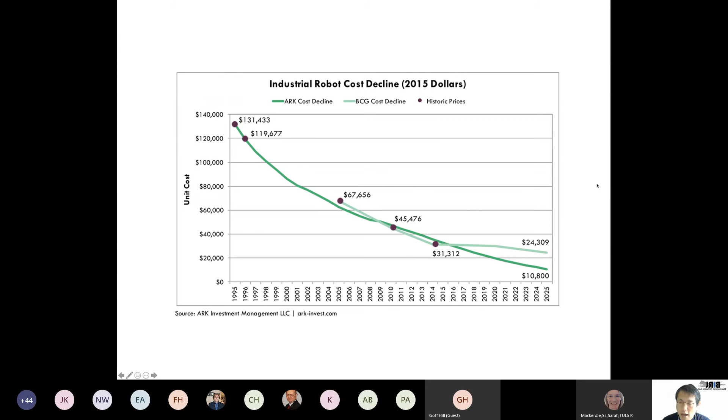The cheaper means that we have technology costs really reduced in the last decades. Just to give an example—similar figures can be found in many places—robotic arm cost has decreased about 60-70% in the last 20-30 years, and this trend is continuing over the next 10-20 years. The price of a robotic arm used to be hundreds of thousands of US dollars or pounds, but now we can buy it for about 20-30,000, and in the future it's going to be cheaper. That will obviously change the landscape of where technologies can be applied.

Also the easier part: technologies are now available in markets. If you have a bit of money you can buy them instead of building everything from scratch in your company or lab, which speeds up development quite a lot. But even more important is probably the connected and shared technologies—a lot of programs and software are already on the internet ready for download, and even designs for mechanical systems are online so you can download them and 3D print if you have a little knowledge of engineering. This is a really exciting point in history, in the sense that robotics is going everywhere, and even if you're not doing robotics now, it's not too late to start, because it's getting easier, cheaper, and faster.

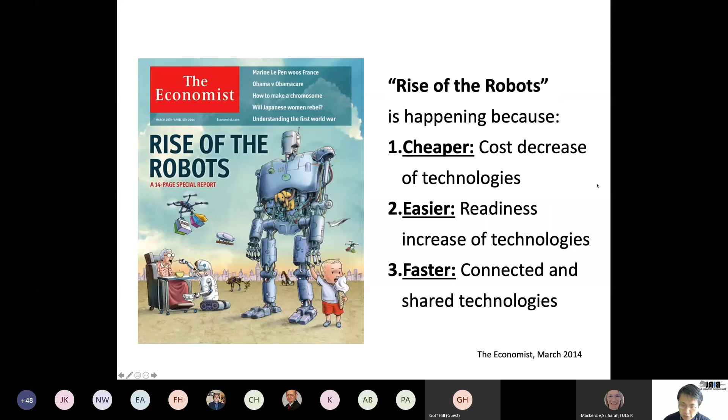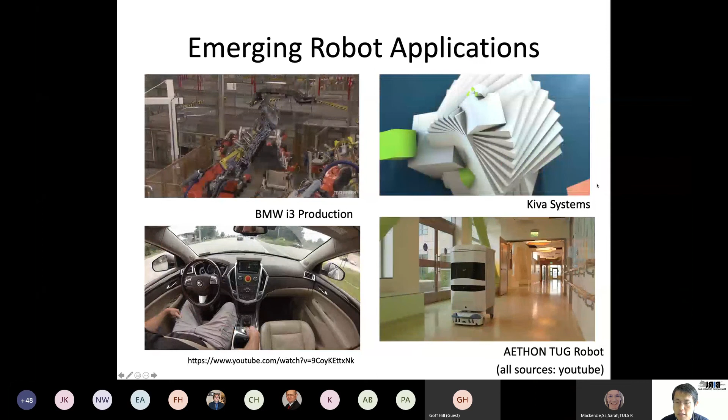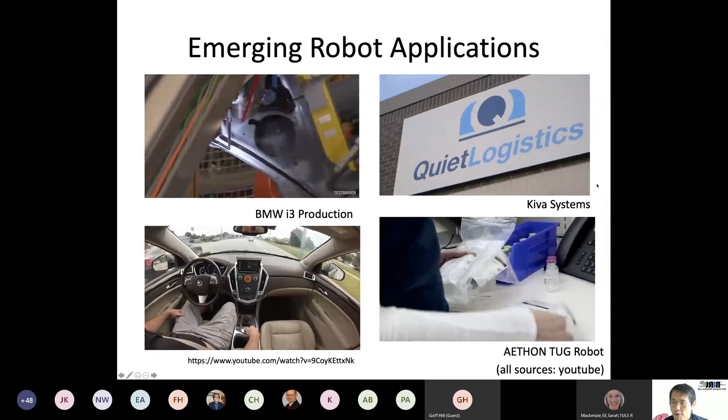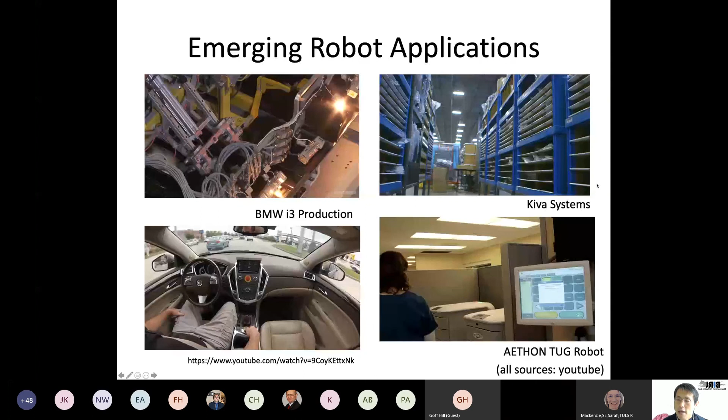We just want to give you some ideas of where the robots are. We don't see robots in our house yet, but robots are actually integrated in many different places in our society. A case in point is car manufacturing factories, where there are a lot more robots than humans nowadays in the latest manufacturing processes. And if you go to warehouses, that revolution is also happening—instead of humans walking around the warehouse, nowadays robots are moving around, delivering items to humans so that delivery can be faster and more accurate. The robots are coming closer to our lives.

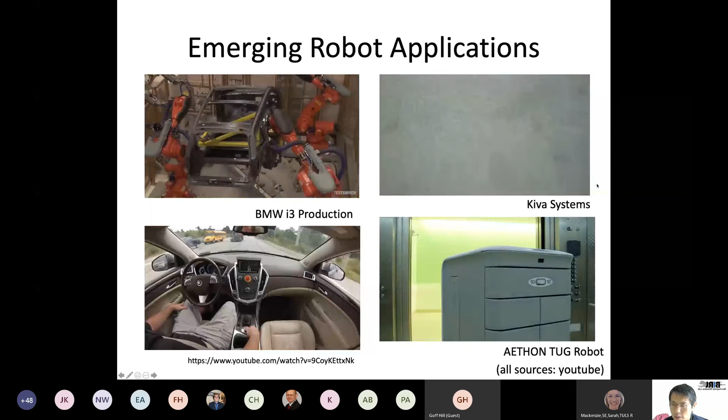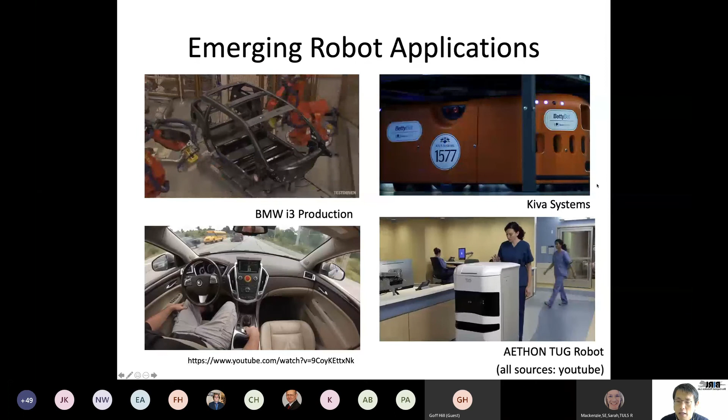We all know that autonomous driving is coming to our daily life in the near future. And delivery systems have attracted a lot of attention, especially with the current problem of social distancing and so on. So you see lots of robots here and there, and there are lots of reports available in the world.

But obviously, not all of these problems are solved so far. The really important question for us, especially for researchers, is which of these problems are solved, and which of them are more difficult or impossible to solve in the near future. So that's a really difficult and important question.

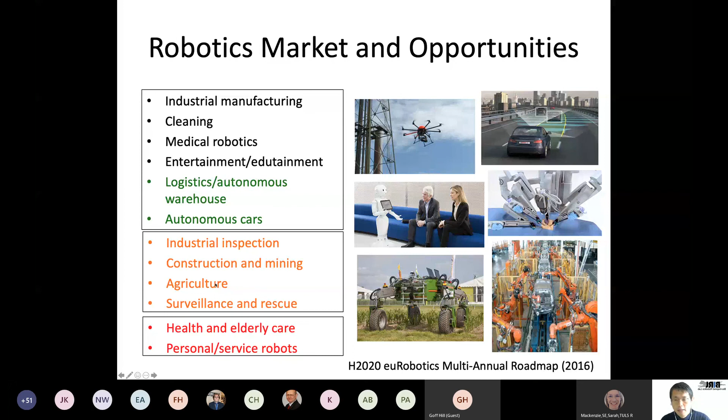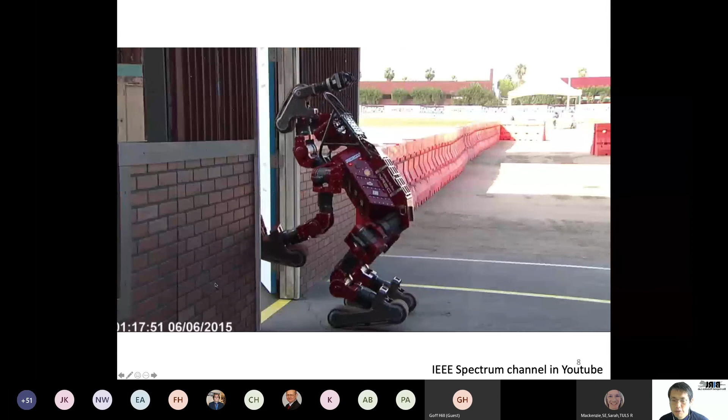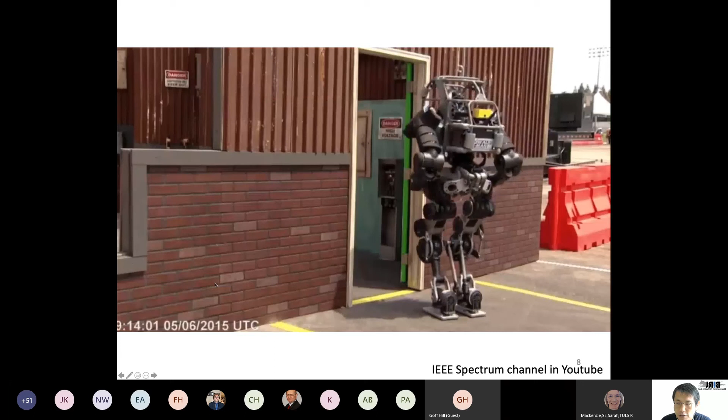So, what can robots not do? This is a famous video you can find on YouTube—the results of a robotic competition 5 years ago, in 2015, in the United States. They actually tried to honestly evaluate how useful robots are in unstructured, complex challenges. This was a competition where they replicated the disaster site of the Fukushima nuclear power plant.

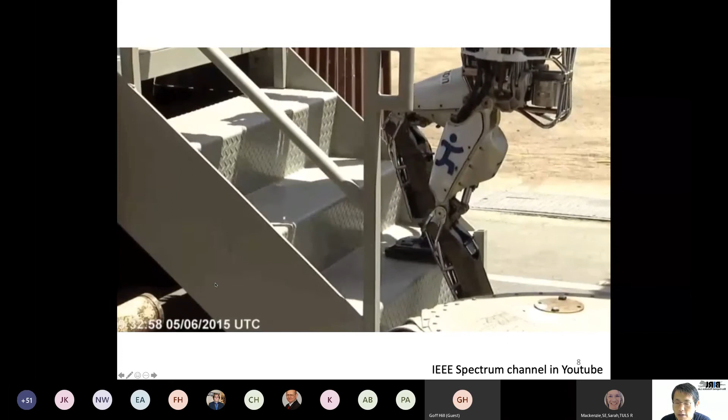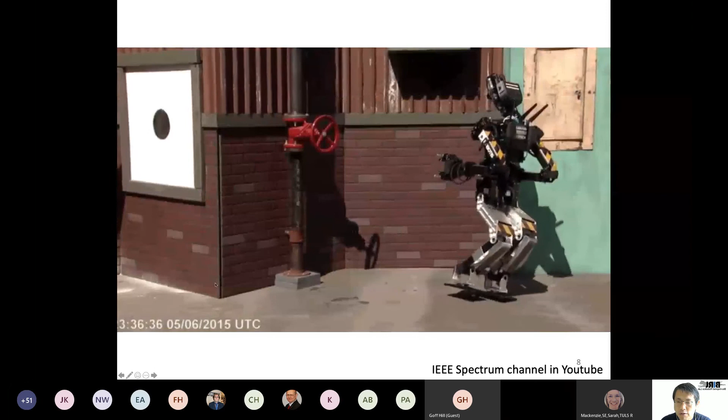After the accident, robots were not very useful at that time, so they were trying to evaluate why robots cannot be used in such a complex environment. As you see in the video, the robots really suffered from easy things like opening or closing doors, opening valves, walking on rough terrain, or climbing upstairs and so on.

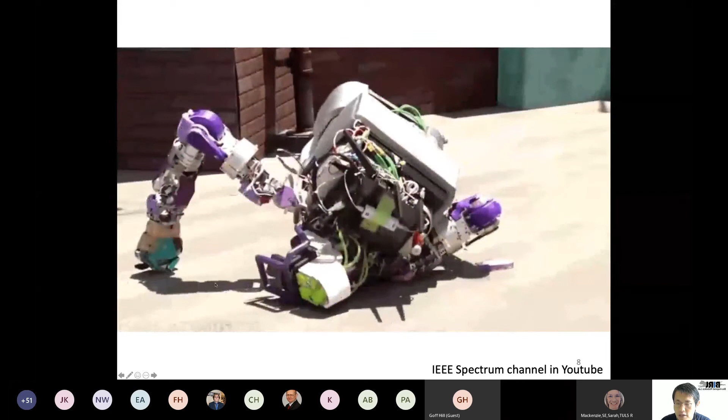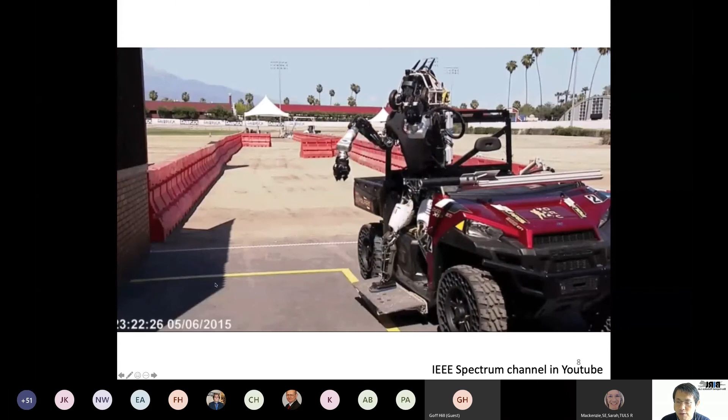And this is actually the reality. It's a really interesting challenge—all these complex robots trying to solve real problems in the real world, but actually our robots have very limited capability. So driving a car is rather easy, but getting off the car is more difficult, as you can see in this video.

So the interesting discussion is: I showed a prior video of a high-performance robot doing complicated things, but here, rather easy things like opening a door or getting off a car—things our child can do quite easily—top researchers are struggling to build for this kind of task. Why is this actually the case? That's an interesting question to explore.

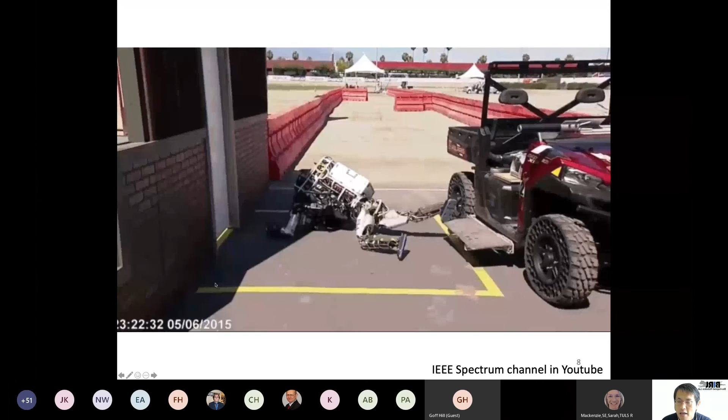To understand this, we just need to understand a bit about the state of the art in robotics. Interestingly, probably 99% of robots in the world use only two basic principles of robotics, and one of them is kinematic-control robots.

What they're doing is only position control, so they can position part of the body in a particular location in time. But what they cannot do is the interaction with the environment. This robot is moving hands in a very rapid way, but they don't put too much force acting on the body and acting on the environment. So the interaction with the environment is a very, very big challenge at the moment.

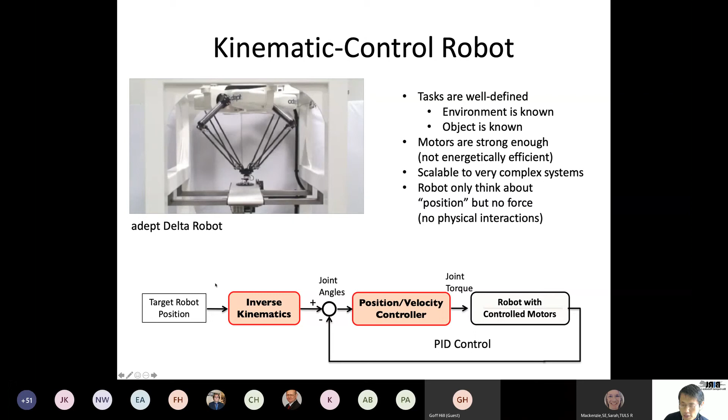So this is really a constrained situation. The robot can do very complex things as long as you don't interact with the environment. But as soon as you interact with the environment, you cannot really do complex things. So that's where we are at the moment.

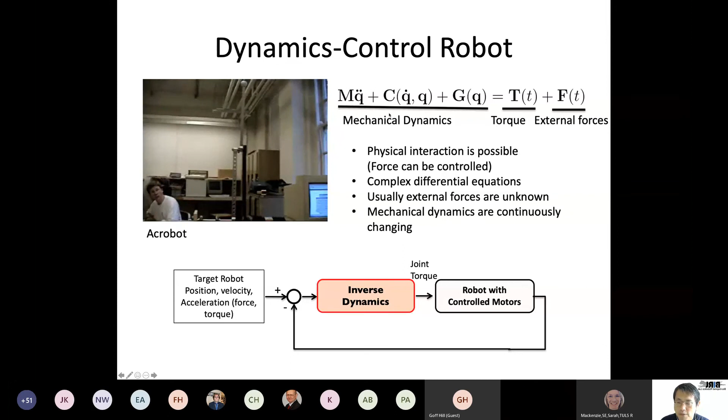If you go to the real world, this is one of the collaboration projects with farmers at the moment. This is the harvesting side of the robot, harvesting lettuces. Robots cannot really be applied very easily here because what humans are doing is very complex interaction. If you think about it, the humans are interacting with the lettuce, cutting it, removing leaves, and putting it in the plastic bag so that they can put it in the sorting mechanism.

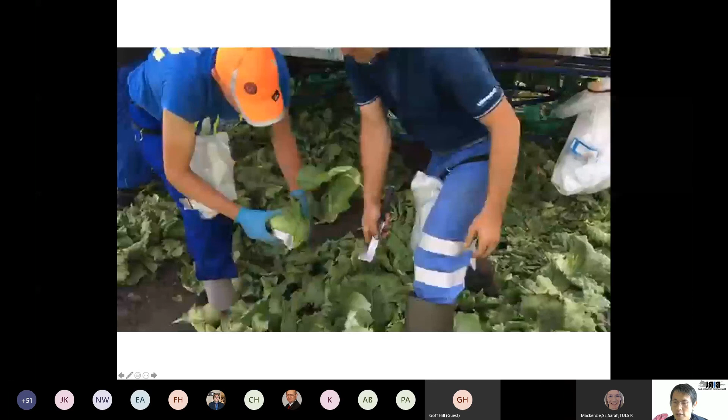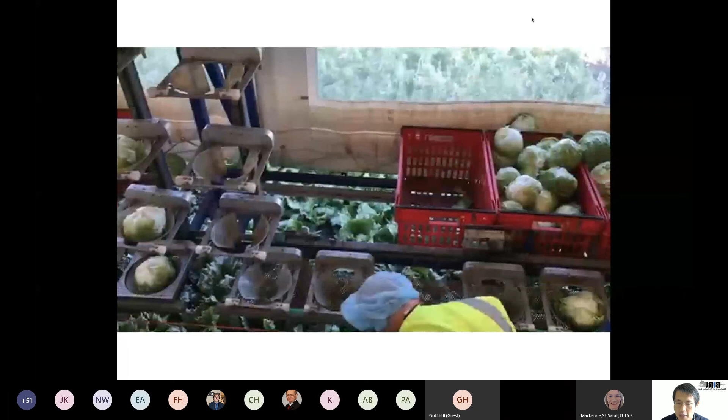Of course, a lot of things are already mechanized. So after harvesting, the machine in the back is doing all sorts of automated delivering processes of the products. But the difficult bits, like interacting with the crops in the fields, are all done by humans at the moment.

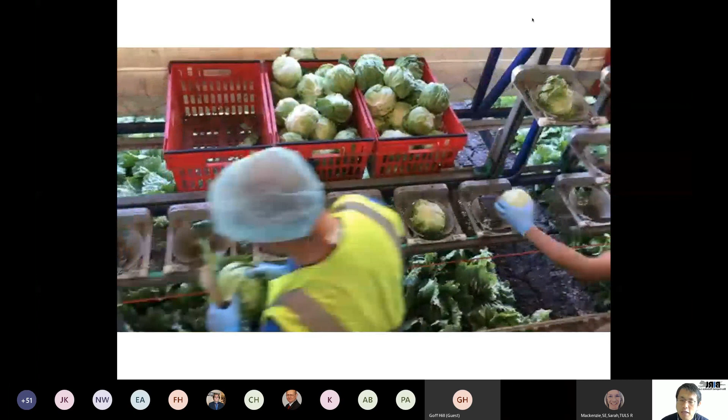There are many challenges like this, especially in the food supply chain at the moment.

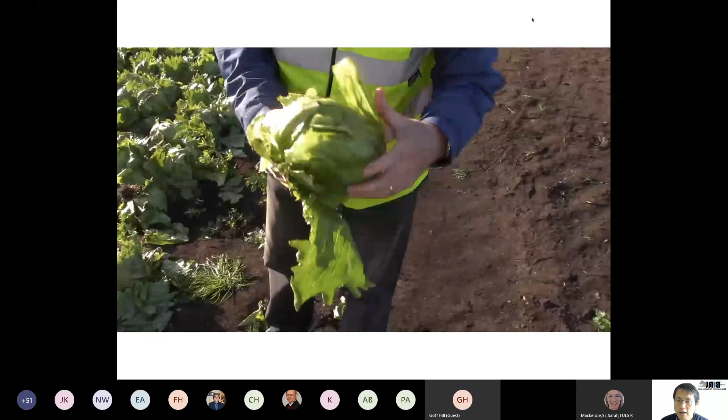I can show you some more examples, and here is the example of how the trimming of leaves can be done. The interesting thing is that every lettuce is different, every leaf is different, and this is a very difficult challenge for modeling it, but humans can do it in a fraction of seconds, doing all this trimming very instantly.

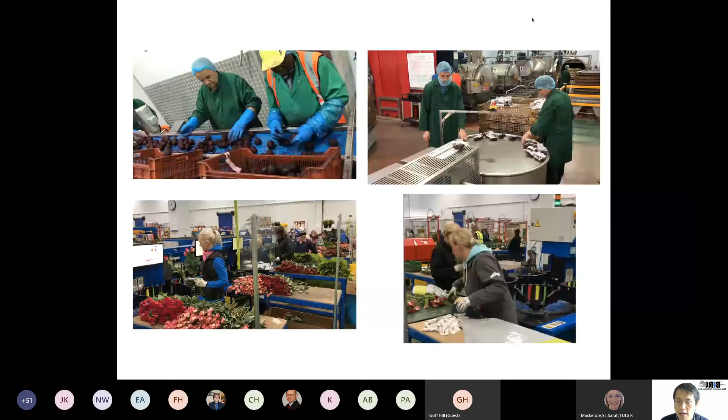Also, some other challenges, like here we show some examples in the beetroot cooking factory. This is a factory located in Cambridgeshire where the cooked beetroot was manually inspected and trimmed by human laborers. And the bottom videos are showing a flower bouquet factory.

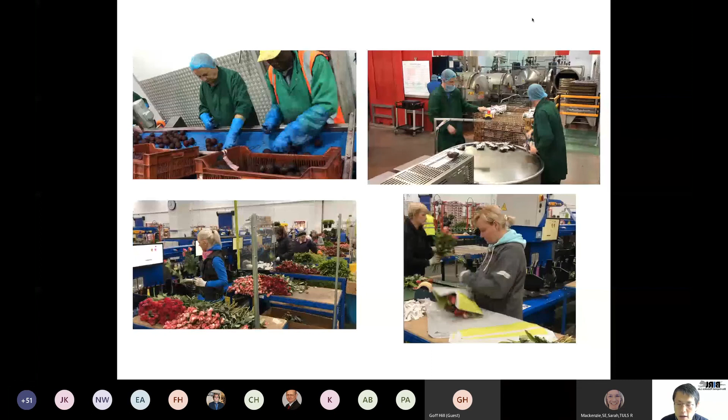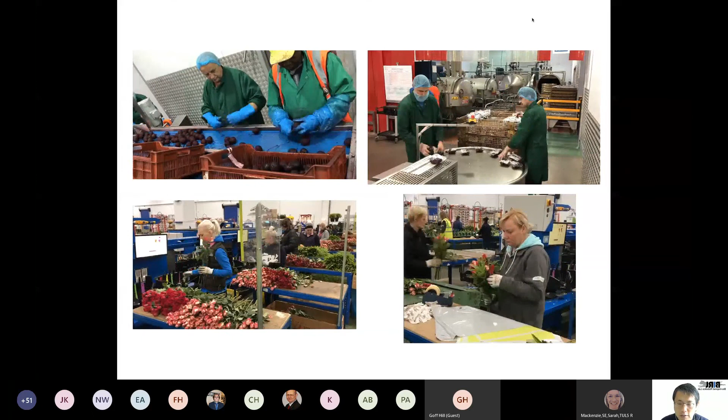This is the factory where they need to make a bouquet out of cut flowers, but a lot of things are manually handled because every flower is different, and aesthetic is very important. So we still have to rely on human laborers here.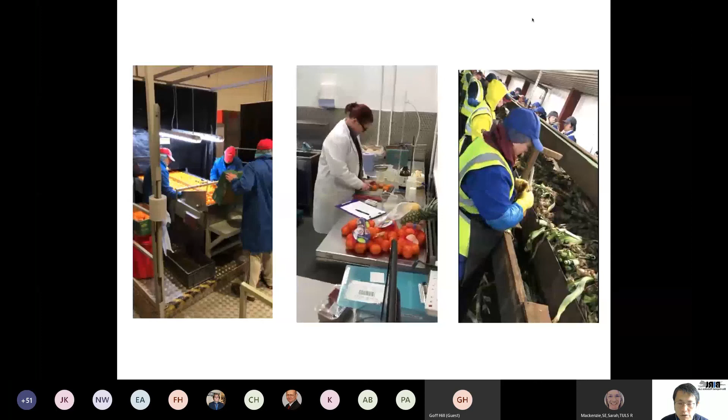Some more examples here are the quality control process in a logistics company, where they're checking every orange, melon, or pineapple, basically manually handled, so that they can measure the sugar level or the quality in general of the products they have.

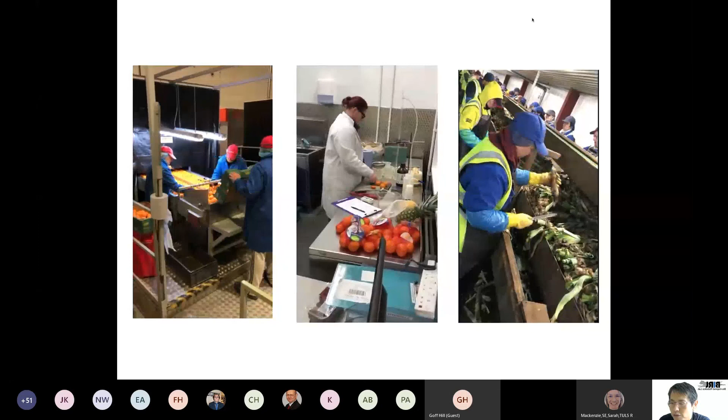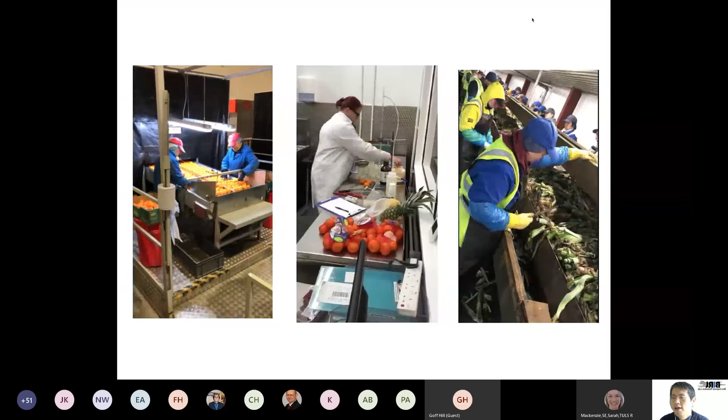And the last video showing on the right-hand side is probably the most difficult one, which is the leek trimming process, where hundreds of humans are actually trimming the leeks so that they can sell them in the supermarket.

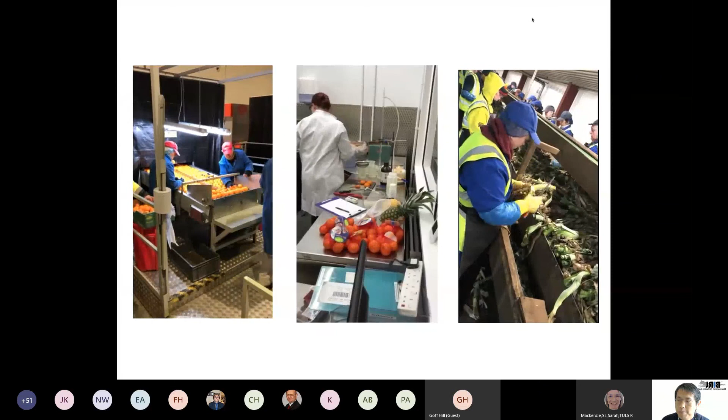We see hundreds and hundreds of workers of this kind still in the UK, and all of this is actually in Cambridgeshire alone. So we already see hundreds of people working on this kind of rather unhealthy and tedious challenge. We're trying to make a bit of a contribution to solve some of the problems there. But obviously, the robots have very little to do in this environment at the moment.

And the problems are mainly on these five points. So first of all, the cost issue — our technology is very expensive.

Most of the human workers are working at minimum wage in UK standards, which is about £8 per hour. And our technology cannot go down as low as this.

But apart from economics, I think technologically there are lots of challenges. Robots are not as dexterous as humans. They cannot do complicated processes, and they cannot do complex sensing problems. Physical contact is very limited at the moment. Also, adaptability is a challenge, like how robots can do many different kinds of things as humans do.

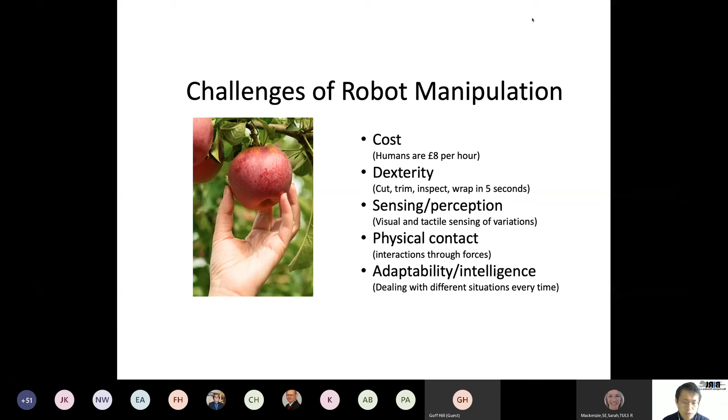So this is the kind of challenge we are trying to solve in the university at the moment. And one of the real challenges is that we actually need quite a paradigm shift in the technology that we have.

Most of the technology we see in the agricultural field is what we call Robotics 1.0. These are machines designed for specific tasks, optimized for one single task, and they can be very fast, efficient and cheap. But what they can do is only one thing, and that's the problem of where the robot cannot go at the moment.

On the other hand, if you go to car factories and other places where we see robots, we call this Robotics 2.0. They have a lot of sensors, lots of computation, a lot of AI. Those robots can do lots of different kinds of things. They're not optimized for one single task, but they can do different things. They have a lot of redundancy, and they can sometimes be adaptive to different kinds of things.

But the real challenge here is actually they are very, very expensive. So this technology can be applied to rather high margin businesses like the automobile industry or some other construction sites, but not in agriculture, because they have a very limited profit margin.

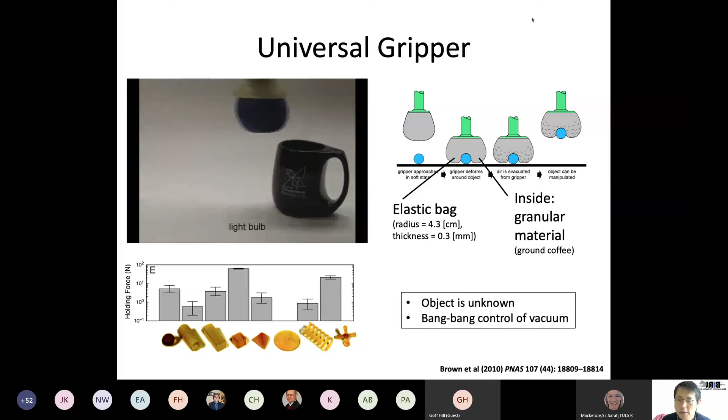So this is a really interesting example because it changes our way of thinking about how to build robots with actuators and sensors.

So the way how it works, the next slide shows how this actual system works. This is the only equation we show in our lecture today, so don't worry too much about it. But the mechanism behind this system is that we have a gripper here. When the gripper is physically in contact with the object like this, the gripper makes some deformation, because of the force acting between the object and the gripper. The deformation is very important because it determines how the force between object and gripper actually occurs.

So the force between object and gripper can be described by the friction force and the sucking force. The friction force and sucking force can be calculated by the geometry of the gripper as deformed by the object. So as soon as you know the angle of contact or area of contact, you can calculate the friction force and sucking force, and so on. You can estimate how heavy an object this gripper can pick up with this kind of equation.

But the most important thing is not the equation here. The equation is actually different object to object. If you have a different object, the equation actually changes. But this equation can be determined by itself. There's a self-organization process of this force acting on this object, and the gripper can be determined by interaction with it, and the deformation plays a very important role for this self-organization to happen. So this is a very different paradigm from conventional rigid robotics, because with a deformable object, you can have an interesting interaction without too much headache about the equation and modeling of the interaction. This is something we didn't have in the conventional robotics paradigm.

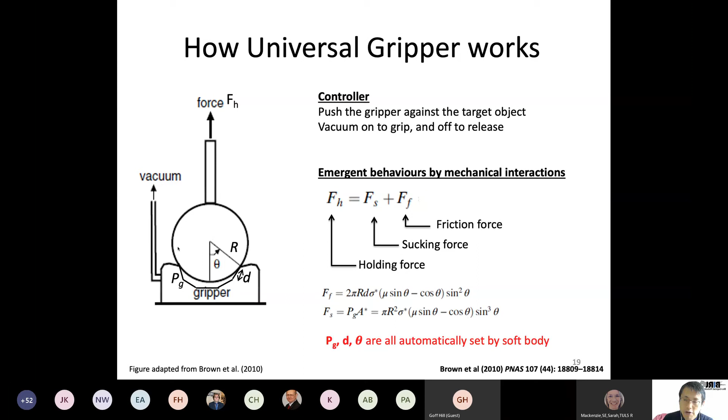But on the other hand, softness is not the only important thing. Rigidity is important, because if you don't have rigidity, you cannot grasp the object. So here, the deformation and stiffening of the gripper is happening because of the vacuum applied to it. So what's really important here is the new paradigm of soft robotics.

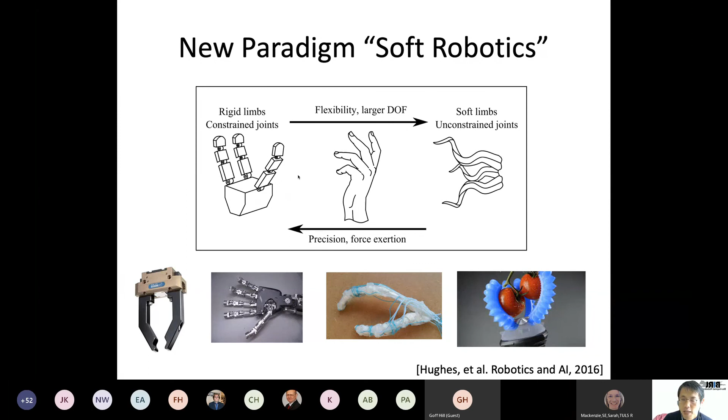But soft alone cannot solve so many problems because the force cannot be transmitted. So the real design challenge here is how we can go back and forth between the soft regime and the hard regime in a flexible way. How we can take advantage of the good aspects of both rigid and soft regimes—that's actually what our hand is doing, because our hand is quite soft if we don't do anything, but we can make it really rigid if we need to.

So that's something we want to understand, how we can make robots like this. We did quite some study of biomechanics and the anatomy of our body. Our body is a soft, rigid, hybrid continuum structure. This is a very interesting aspect that our traditional robots don't have. We have a very packed sensor-motor unit in our body, so that's another way we need to think about it. And overall, we need a lot more complex control procedures that allow the use of this complex structure in our hands.

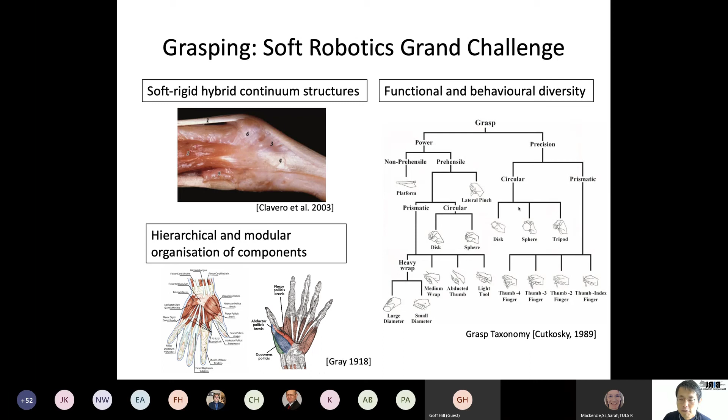So I just want to show you some highlights of our recent research work. All these robots are quite useless at the moment, but it goes down to the real fundamental question about how we can make soft robots.

One attempt we did quite some time ago is the anthropomorphic robotic finger. We basically copied the anatomy of our hands, human hands, into artificial fingers. We 3D printed bones and put them together with elastic ligaments and tendons, and added motors so that we can actuate these fingers in a human-like fashion. The motion of these fingers is quite interesting—it's more human-like than conventional robots.

But the real challenge is that as soon as you have a soft body, we need lots of motors. In this case, we made a structure of 2.5 fingers like a human hand, and we needed 14 motors to control such soft structures. This is really useless at the moment, but it captures a really important point on how complicated it is to control soft structures, although there are lots of interesting aspects in soft structure.

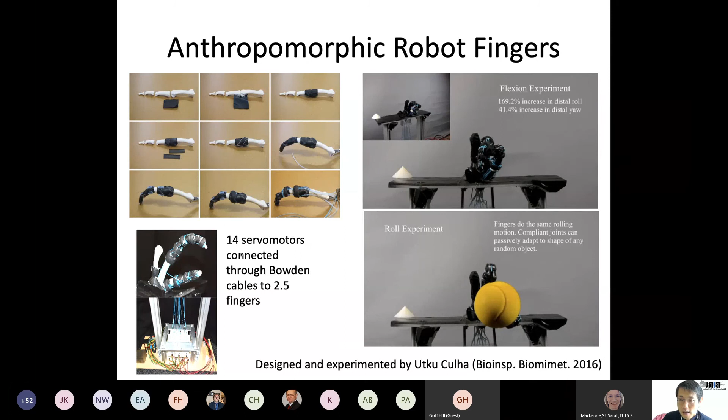So we started investigating new manufacturing techniques to cope with complex structures like our hand. This is the attempt we tried with the multi-material 3D printer, which is able to print both hard, rigid, and soft materials. Here we try to make a hand skeleton with rigid bones and soft ligaments in one go. We can wait 7 or 8 hours to print one hand, but everything can be automated—in one night, you can make a very complex structure like our hand.

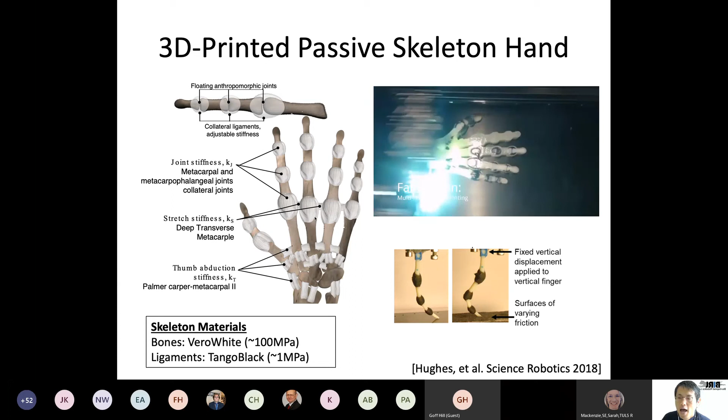We are also interested in how we can use such a complex structure, skeleton body. So this is an example of a passive anthropomorphic hand controlled to grasp different kinds of things by applying wrist control. So the grasping is not just about the finger motion, but also the intelligent control of wrist motion, and that can actually help complex interaction with the environment.

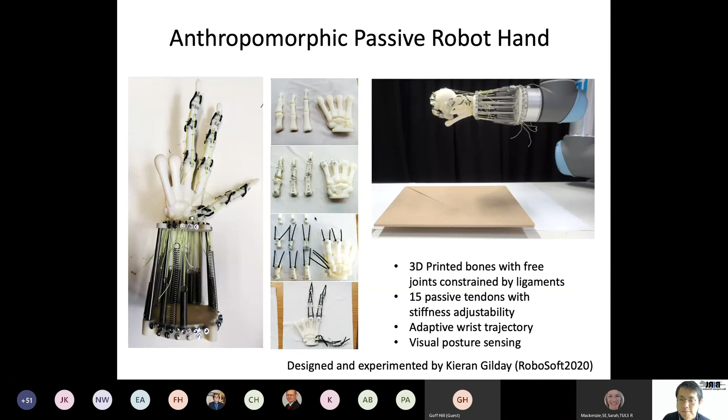And also the geometry is very important. Our hands developed over millions of years of evolution. So we have a collaboration with biologists on how we can think about good design for robots, not just copying nature or the design of our own hand. In the first place, we don't know if our 5-finger hand is already optimum or not. There are many other cases, like human families with 6 fingers, which was discovered recently, and whether there's any room for optimization in our hand or not.

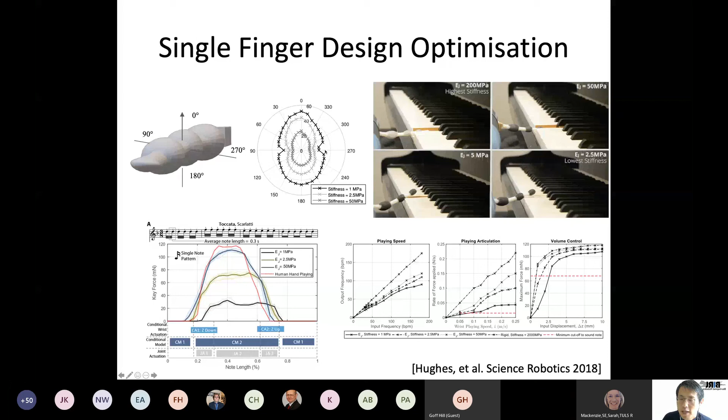So we're applying an optimization problem, like what mechanical properties we actually need for our hand. This is the example of the finger optimized for piano playing. If you play piano, rigidity is actually quite important to articulate sound. So we want one axis to be quite rigid, whereas in the other direction we want softness, because we need a lot of flexibility in behavior. If you think about playing a complex piece with side motion of the hand, we need a complex structure in the joints of the fingers so that we can do complex operations, and complex, quick operation of the hand can be done by passive properties of the hand.

So this is an interesting ongoing research about how we can make a complex structure with new manufacturing methods.

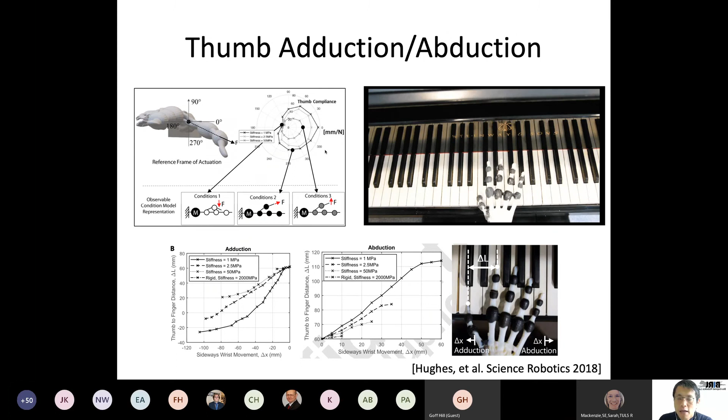One more thing we need to think about is the sensing problem. Electronics are usually very rigid. If we want to implement electronics in a soft structure, a lot of challenges come with it. So we are investigating how we can make sensors bendable and stretchable on soft surfaces. That's another big area of research, and we're experiencing a big advancement at the moment.

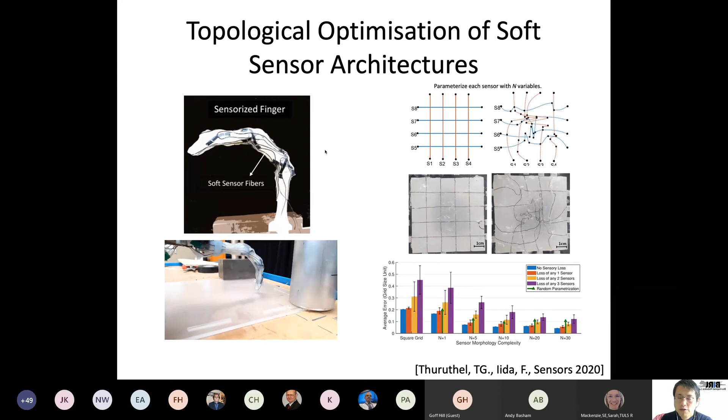So this is the main message I want to place in my presentation here. The last part I want to talk about is really the next big challenge: agile robot prototyping, to make a robot revolution happen. So what we've talked about so far is really the technology we're developing in university.

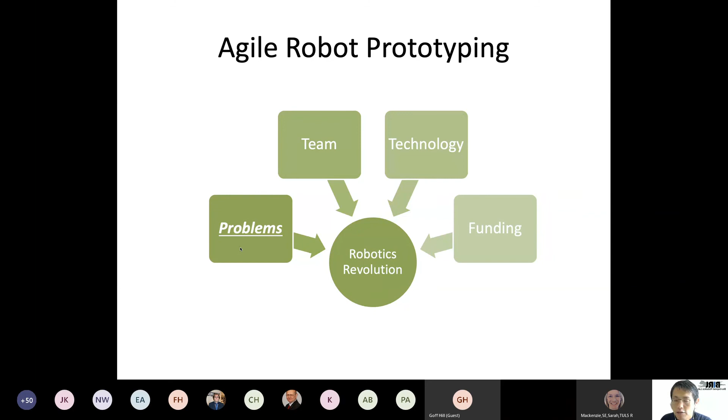I just want to show you some examples of how we did this problem-finding to make a robotic revolution happen. One example is the lettuce peeling problem I showed you earlier, from our collaboration with a lettuce harvesting company. Two graduate students in my group have looked at the lettuce peeling problem, and they've really found that this problem is not easy to solve.

They worked very hard over a couple of days in the lab to solve this problem in a brute force way using existing technology. This robot uses an existing robot platform with computer vision that applies stem detection and leaf detection using conventional computer vision algorithms. We then use 3D printing technology to modify a vacuum cleaner attached to this robot, adjusting how the leaves can be picked up rather than the entire lettuce. This kind of development can be very, very quick. The whole project was done in 4 months with a budget of £1,000.

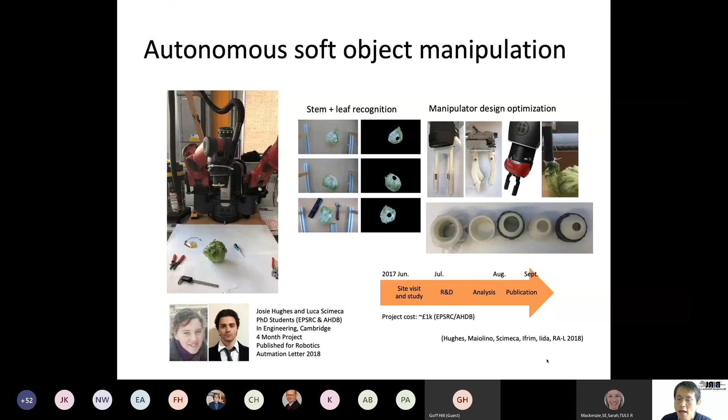This is the cheap, easy, fast development of the robot exemplified here. We were even able to publish this result in one of the most prestigious robotics journals. This case study shows how quick development of innovative solutions can be done with a minimum budget. And we have lots of other similar examples.

This is a computer vision problem worked on by undergrad students we have in Cambridge - a fourth-year undergrad student studying computer science. In collaboration with a farming and growing company, she wanted to apply state-of-the-art deep learning methods to detect and quality control lettuce before harvesting. She went to the field to take pictures and applied this data to existing deep learning methods, managing to solve the problem in about 4 or 5 months.

We went to the lettuce field at the beginning, the end of the season in October, then had 2 or 3 months of R&D, and did on-site testing when the season came back in April. We published very quickly again. This was an undergrad research project, so we didn't need much budget for it, and we could solve this problem quite easily.

The interesting thing is the deep learning method we used, called YOLO - the you-only-look-once algorithm - is available on the internet. We can download this code and the student can learn to use it through an online tutorial. What she needed was just to go to the field, take the data, and label it. Then we get results showing where the lettuces are, and we can see whether they are mature enough or infected, and so on.

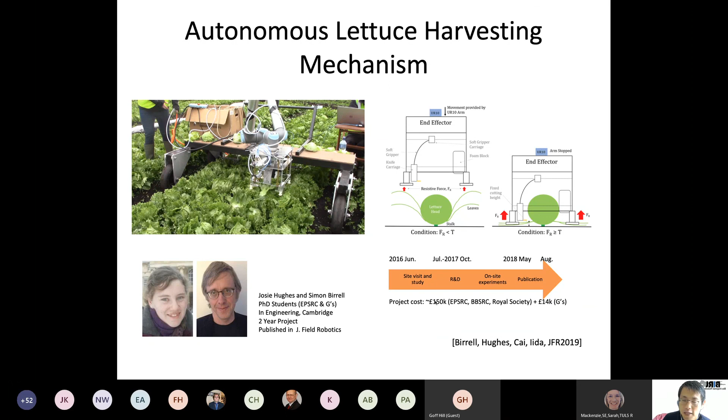Another example is tactile sensing of mango products. Mangoes and avocados are typical hard shell fruits, and it's very difficult to see their maturity level without destroying them. At the moment, everything is destroyed by sampling to analyze maturity.

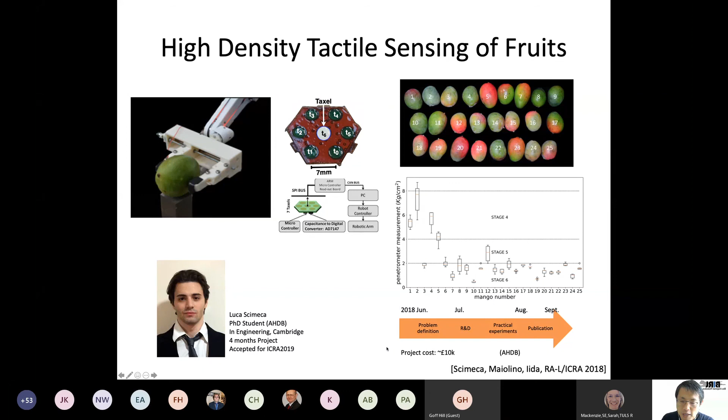Now we apply state-of-the-art tactile sensing technology, using sensors to analyze how maturity level and tactile sensing can be correlated, applying machine learning to see whether a tactile sensor can detect the maturity level of mango without destroying them. This was a 4-month project we did with one PhD student, sponsored by AHDB.

A slightly different direction of research we're doing is cooking, because cooking is a quite interesting challenge that everyone struggles with. We started with an undergrad student project with a kitchen appliance company to discuss what the future of the kitchen looks like. In this particular case, we thought of the omelette making process.

So we programmed the robot such that it can cook omelettes in a reliable manner. Here, the robot is actually able to make about one omelette in a few minutes. We feed it a lot of eggs so the robot can try different tastes of omelette. The robot actually makes 80 or 90 omelettes and gives them to human subjects to see whether humans can actually see the difference between the different omelettes in terms of taste, texture, appearance and so on.

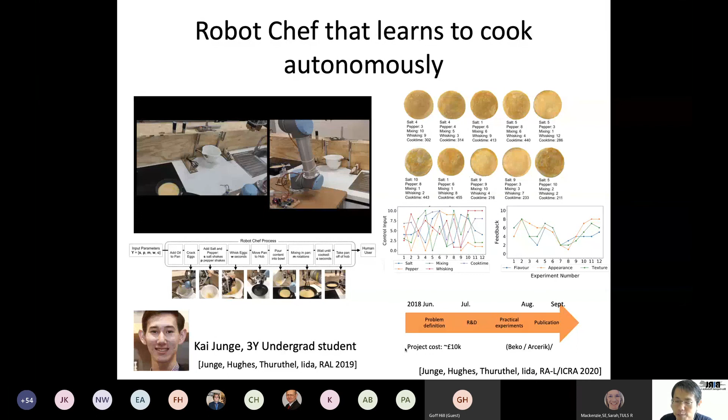One of the interesting challenges is how the robot can learn the preferences of individual humans. So we apply machine learning techniques to see if robots can actually figure out what cooking process is related to human preferences for the taste of the omelette. We're hoping that the robot can make better and better omelettes by interacting with humans through tasting.

A lot more we can do involves computer vision technique, because the cooking procedure is very complex, and programming robots for cooking is very, very challenging. So the new technology we're trying here is the state-of-the-art human pose estimation algorithm. This algorithm is not developed by ourselves - we found it on the internet. It's called the Open Pose tracking algorithm. The undergrad students actually learned to use this in a few weeks and applied it to our cooking experimental setup.

So what we're doing here is using this open pose tracking system to see how a robot can learn from demonstrations of human cooking. Here we have a pancake - in this case we tried pancake cooking. We ask humans to cook pancakes and see whether some features can be extracted from the process, and the robot actually tries to learn from humans how to cook a better pancake without really going through the complex programming process of cooking.

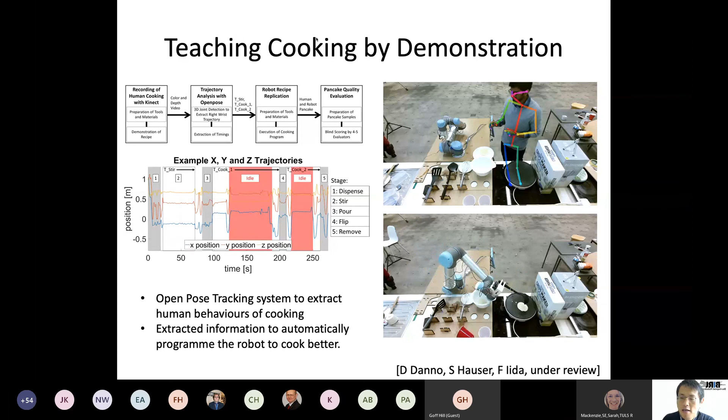One last example we're showing here is dishwasher loading, because through discussion with our kitchen appliance company, the pain point of the kitchen is actually the cleaning part. So we explored how a robot can be used for cleaning trays. In this particular case, we went to college canteens to see the reality of the mess we see in trays at the canteen, and we collected all this data for use with deep learning methods.

So the undergrad student Isabel went to the canteen and took a lot of pictures of unstructured trays. Then we applied the computer vision algorithm available on the internet to recognize the locations of cutlery, plates and cups, and applied that to the robotics so the robot can pick and place the unstructured tray items into the dishwasher. This is a very early prototype, of course, but we can actually try this kind of development on a very short time scale with undergrad students.

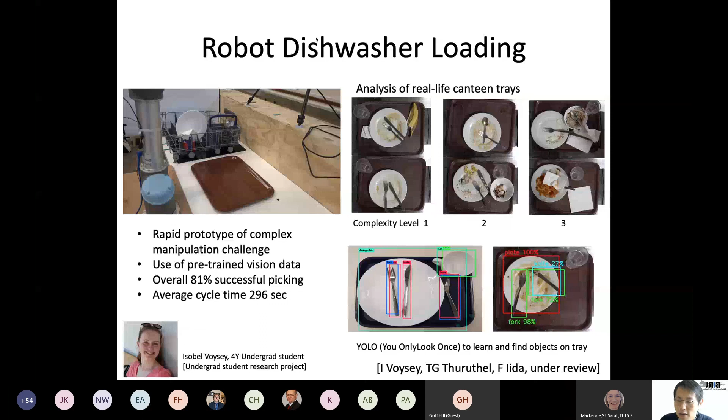All these things are possible because of the rapid prototyping technologies already available on the internet and in our laboratory. So what I'm trying to show you here is that the real robotic revolution is happening because of rapid prototyping, and site visits are very important. Problem identification is the really important part of the whole process. But as soon as we find a problem we can solve, the research, development, publication and patents become very streamlined in the university environment.

So in our department of engineering in particular, we have a very good facilitation mechanism involving industry partners, as well as finding students and funding, to get all this rapid prototyping to happen very quickly and easily.

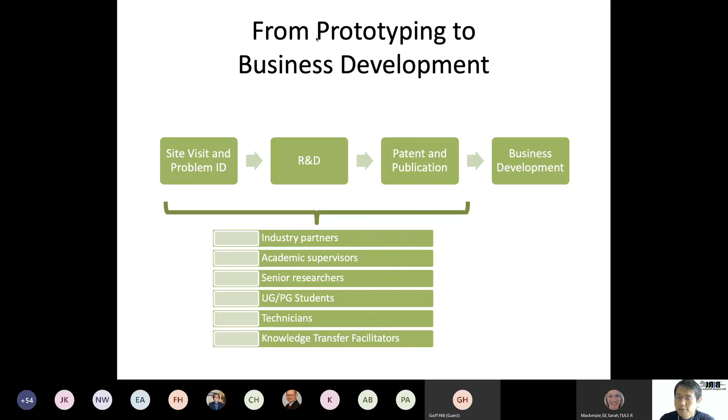And obviously, the business development is a real challenge from there. But that's something we have to address after all this, the prototyping happens in the university.

So I just want to address this really interesting opportunity we have in Cambridge. All these things are not done by myself, obviously. There are so many students excited about all these real world challenges.

So we have a bio-inspired robotics laboratory. We have about 10 to 15 very talented postgraduate researchers in-house. And also we have a Cambridge University Robot Society, with about 50 or 60 really problem-hungry young undergrad students waiting for problems to encounter.

We're trying to really find out how we can streamline the research development so we can do it quickly and in a more impactful way. Another important thing is the funding agencies around us. The company is not paying all of the research and development costs. We have mechanisms like the Research Council, Royal Society, or other funding mechanisms trying to minimize the investment of the company side so we can actually provide easy access to the technologies at an earlier stage of development.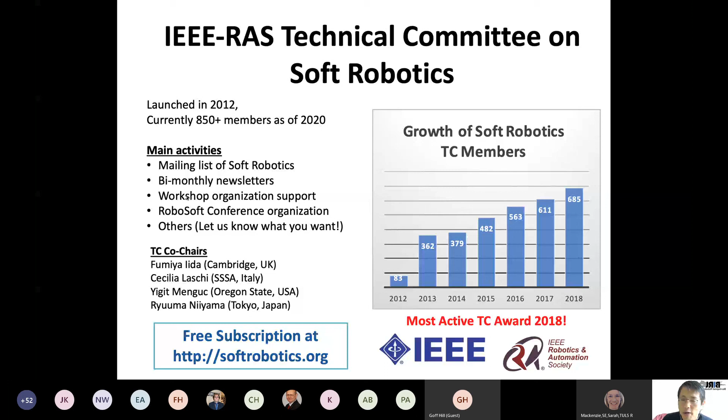And if you're interested in more information, we also have the soft robotics mailing list where you can find a lot of new activities going on in this field. If you subscribe to the mailing list at softrobotics.org, you will receive the bi-monthly newsletter we issue, so you can get a bit of flavor about what we are doing in research and development.